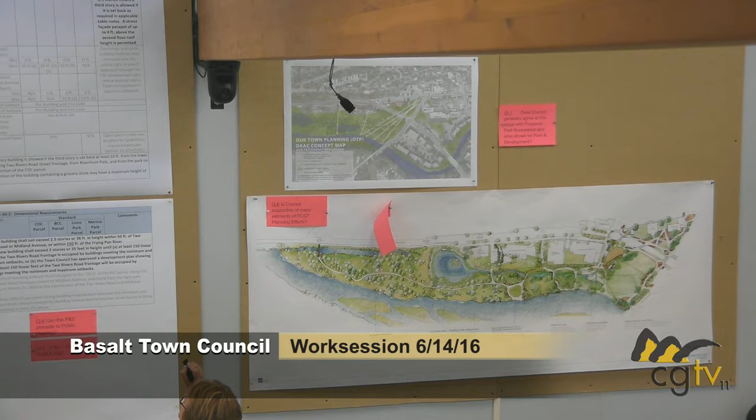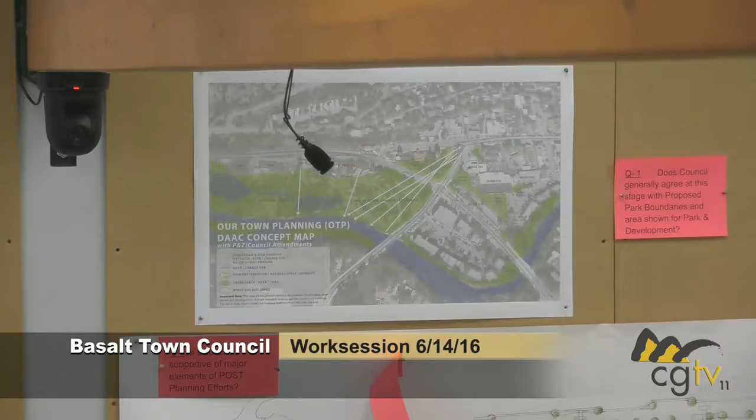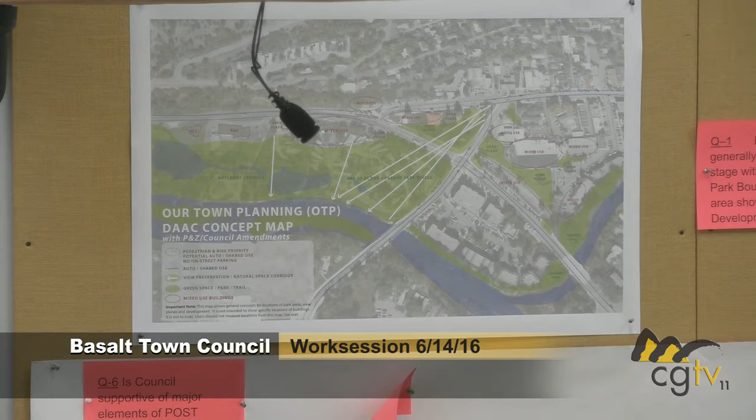Our second question is, does the council agree at this stage with the number of stories and the height for our town planning parcels? Question 3 is, does the council agree with the uses that are being recommended for the 4 parcels? 4, can the P&Z proceed with their process for adopting the CSC zone district regulations? And 5, if the answer is no, then what kind of direction does the council want to give the P&Z? Then 6 are the items that concern the Parks Open Space and Trails Committee.

One is if the council is supportive of the major ideas, the major elements of the POST planning efforts, and if the answer is yes, is it still appropriate that we're working towards this July 12th deadline that we'll be talking about a little bit later. So with that, I'm going to turn it over to Laura for her history.

Hi, Laura. Hi, Jackie. How you doing? Good. I'm Laura Kirk. I'm with DHM Design, and Jackie called me a couple of weeks ago and asked if I could do a 10-minute history of the planning on the Pan and Fork property. And I'm telling you, that is a pretty tall order. So we'll see how I do.

So really what I'm going to do is focus on milestones in the planning process, and I'm going to go pretty quickly. I just want to make sure we don't forget the level of passion and commitment and engagement and participation there has been on the part of this community throughout that planning process. So as I whiz through that, I just want everybody to remember that, because sometimes it will seem as though perhaps we're not giving that its full due.

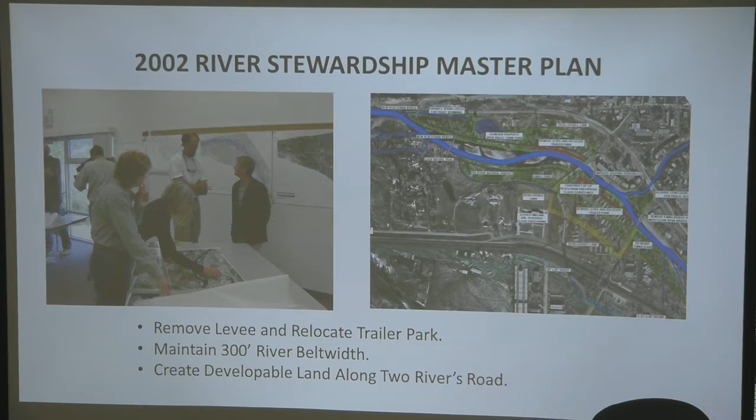Those principles were incorporated in the 2007 Basalt Master Plan, reinforcing the work that had been done earlier in 2002.

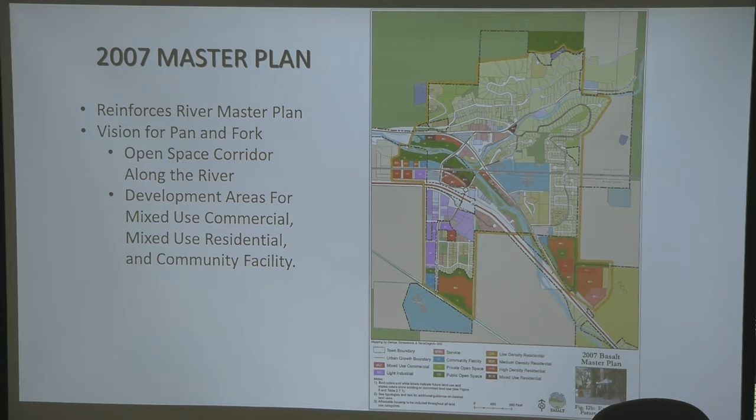In 2011, there was a major movement regarding the Pan and Fork property. The Roaring Fork Community Development Corporation and the town of Basalt bought that 5-acre parcel. With that purchase, planning and design moved forward on both the CDC parcel and the town park parcel, incorporating the primary concepts from the 2002 River Stewardship Master Plan.

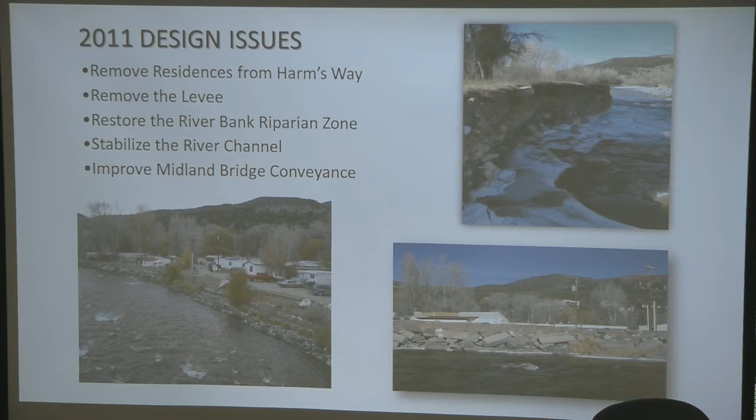Between 2011 and 2012, there were a wide variety of public meetings on both the park parcel and the CDC parcel in all kinds of venues, and there were presentations to P&Z and the council.

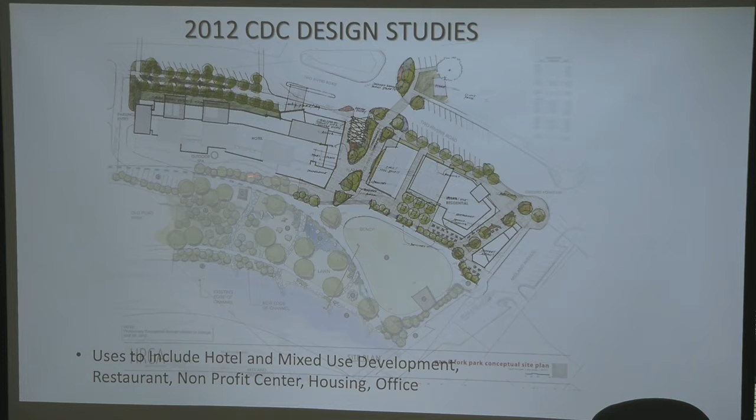One concept presented in the fall of 2012 was when the CDC was working with a hotel developer. They had a concept for a hotel on the west end of the property. The RMI side is on this end. In this area, this is Midland Spur, there was a proposal for a CMC or a nonprofit center. On the corner closer to Two Rivers Road and Midland Avenue was a proposal for mixed use, including some residential. And on the lower half of the property, the park planning effort was moving forward.

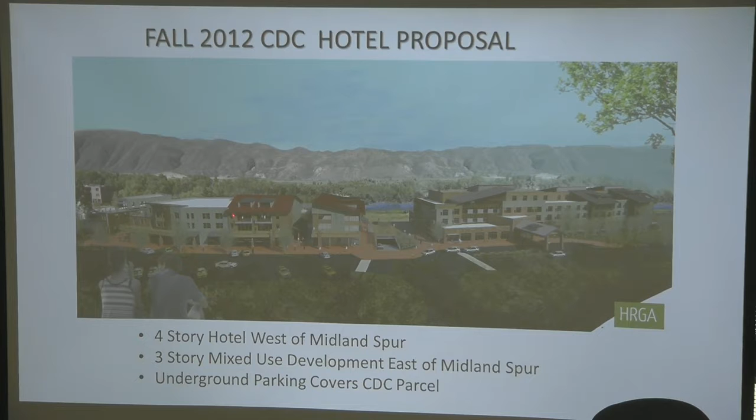The park planning effort was moving forward with constant check-ins with POST, the public, council, and P&Z. Many of the program items envisioned in 2012 are still carried forward in the park planning effort today, including an event lawn, a band shell, a children's play area, and some extension of passive recreational and wetland areas.

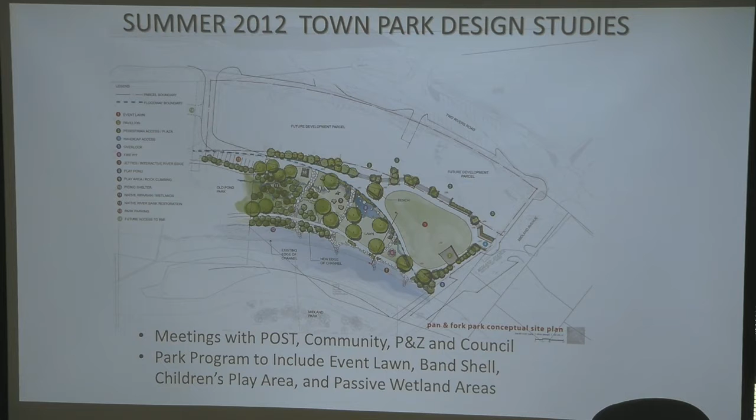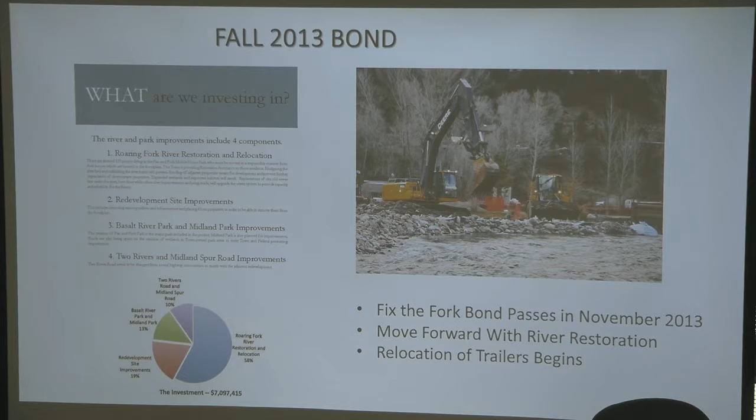The next major milestone happened in the fall of 2013 when the Fix the Fork bond was approved by the community. That approval allowed river restoration work to proceed on the river corridor itself, and that's when work began in the river corridor, which also triggered moving forward with the relocation of the trailers.

At that time, the community also began a very engaged and intensive process, bringing forth their ideas for the vision of the Pan and Fork property. Those efforts proceeded in a number of ways, one being the Our Plan kickoff and the Our Town planning meetings. Those resulted in a whole series of plans generated by the community itself, ranging from plans with very intense development to some plans that saw only park.

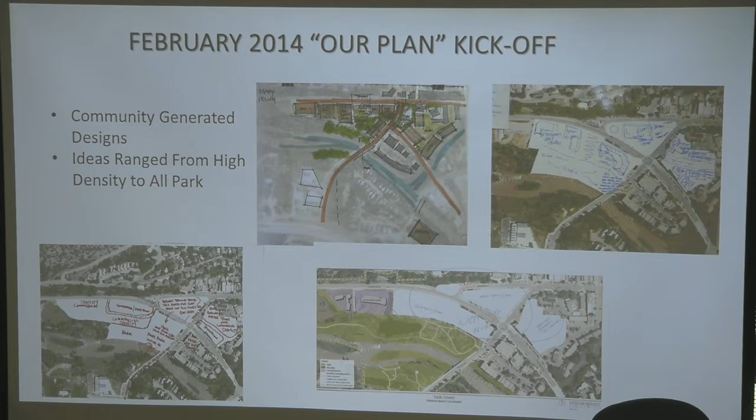The next phase of the community planning effort moved forward with 3 site plan options presented in June of 2014. The 3 options were voted on by the community in a web-based, unscientific survey, and looked at different arrangements of development on both the CDC parcel, park open space along the river corridor, development in Lions Park, and development in the Clark's Market area.

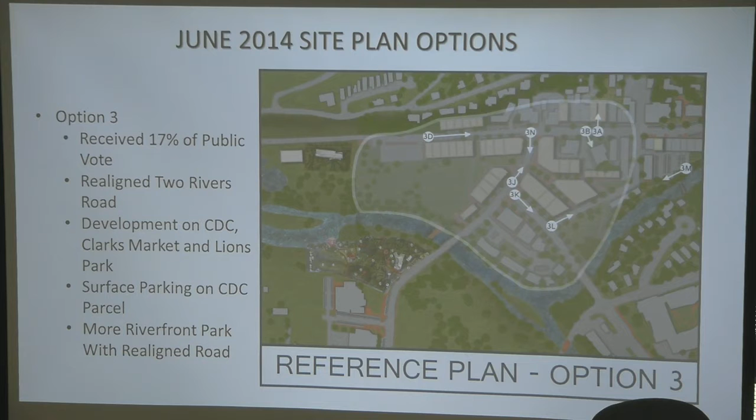The third proposal was different from the other two in that it removed Two Rivers Road here, relocating the streets and having intense development along Midland and the realigned Midland Spur, as well as in the Clark's Market area.

Want to interrupt just one second? Yep. I know we talked about this, but I can't remember if there's any way that we would have known what these different options' square footage was or anything.

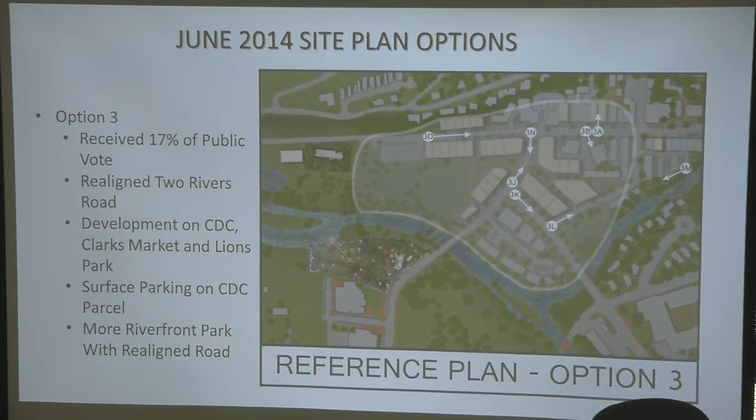There were, with each of these site plans, a whole series of drawings that went with them. In terms of square footage of development, I don't think those were there. Visually, you get an idea, a little bit of one.

At this time, there were still trailers in the park, and they were just going through the relocation process. The river restoration construction was underway, so the view we have now from Two Rivers Road and Midland wasn't available yet to the community. I think once the trailers moved and the restoration project moved further along into the fall of 2014, that's when the nature of that property really changed in terms of people's ability to envision how it might be.

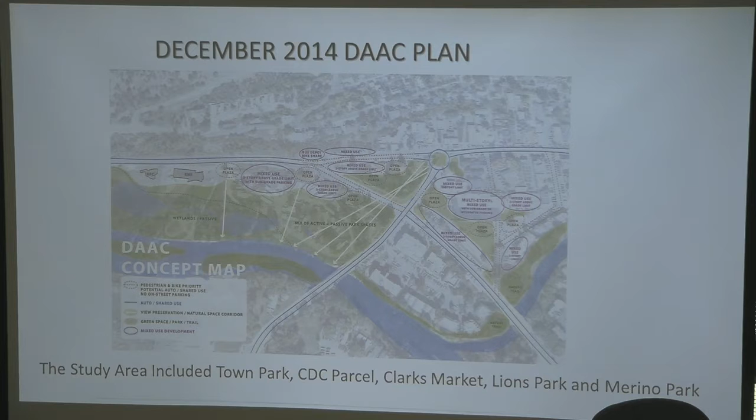Moving along at the same time, Lowe's Development was working with the CDC and had reached a development agreement with the CDC, moving some development proposals forward. The Lowe's Development Group had incorporated the Big V into their proposal.

This was one of their proposals that included a hotel and a series of mixed-use development. They envisioned development in what they called the wedding cake, a mixture of 3, 3.5, and 4-story buildings. This is an illustration of that development from the south side of the river.

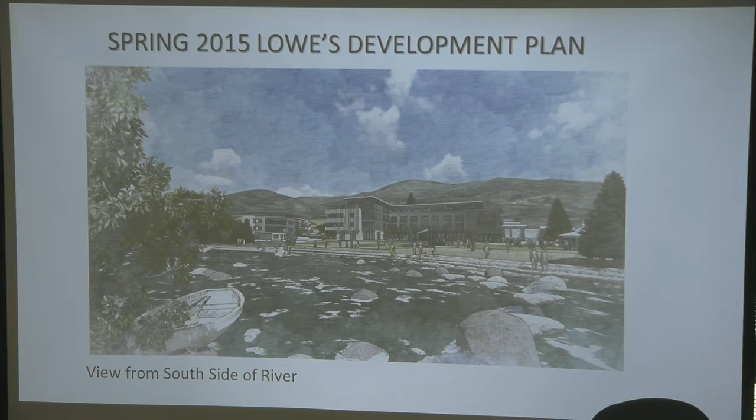The square footage on the first proposal from Lowe's was 155,000 square feet.

In April of 2015, Council was having one of its regularly scheduled quarterly meetings, and they took up the discussion of what was starting to feel appropriate in terms of development for that parcel, based on the proposals from Lowe's and community input derived from a variety of public meetings, both with P&Z and Council.

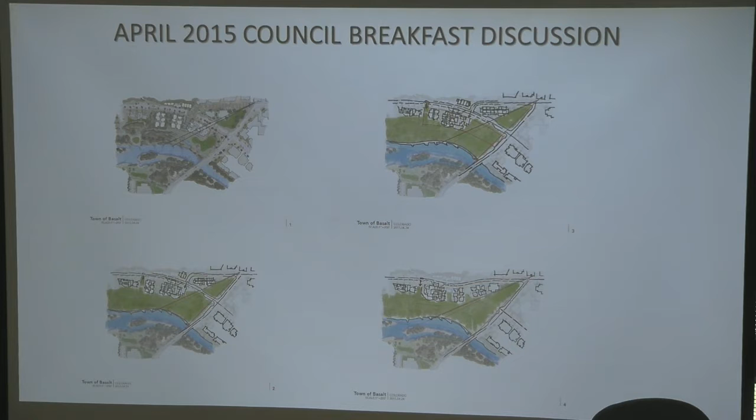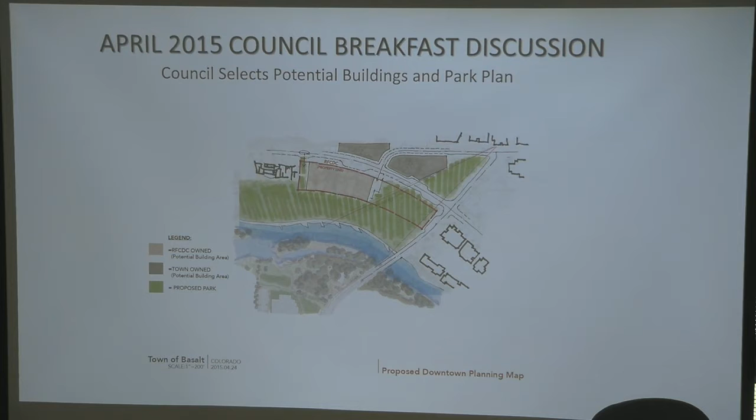That resulted in a new diagram. You can see here that now the private development is looked at as occurring from the Midland Spur west, and that everything east of the Midland Spur would be what has now become called the Polygon, as well as the park and open space maintaining the Big V.

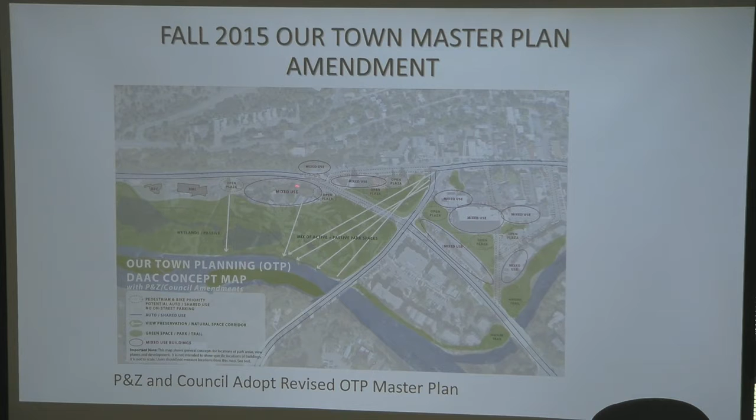That drawing and concept was further refined through a process with the P&Z and the council to develop this amendment, including this new map to go into the previously approved DAAC master plan. This revised map again includes the Big V, and again shows development west of the Midland Spur.

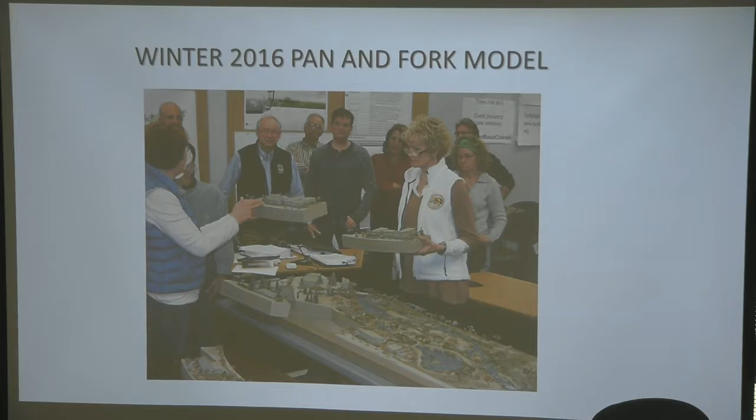To help the community understand what all this means—because you look at all these maps and it's really hard to envision what it looks like—the model behind you was commissioned to help put that into 3D perspective. There are a number of parts of that model that can pop in and out so that different development proposals can be looked at and evaluated.

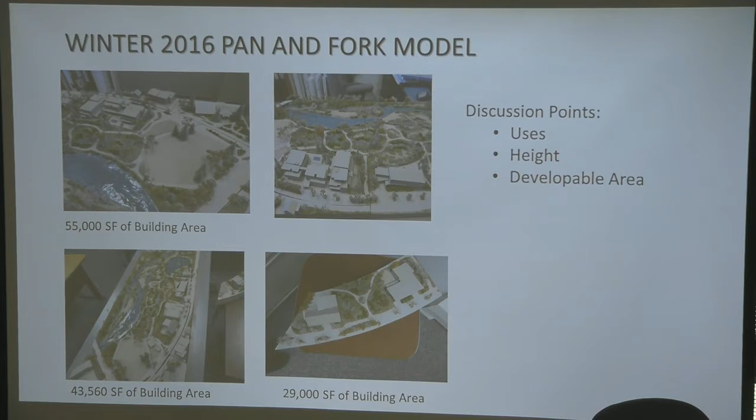One of the proposals included a new development plan from the Lowe's Development Group, looking at 55,000 square feet of development. There was also a proposal from the Citizens Petition Group that looked at a slightly smaller amount of square footage, configured in a different massing with lower view planes.

While the discussion about development on the CDC parcel has continued to move forward, so too have the design efforts for the park planning effort. All through 2015, we had a variety of meetings with Post, the community, and others, and here's a drawing by one of the Post members helping us look at development of the park design.

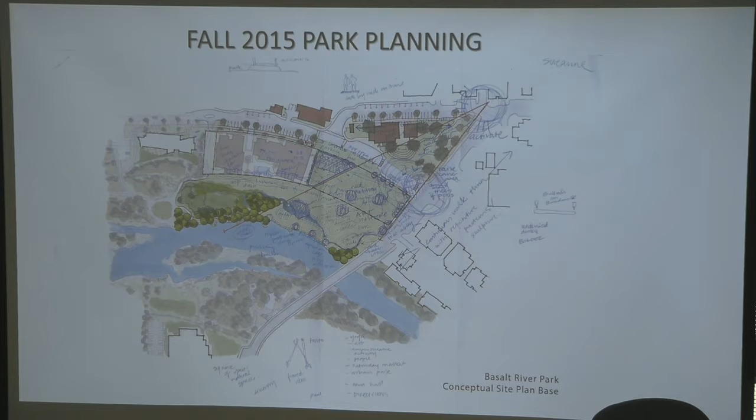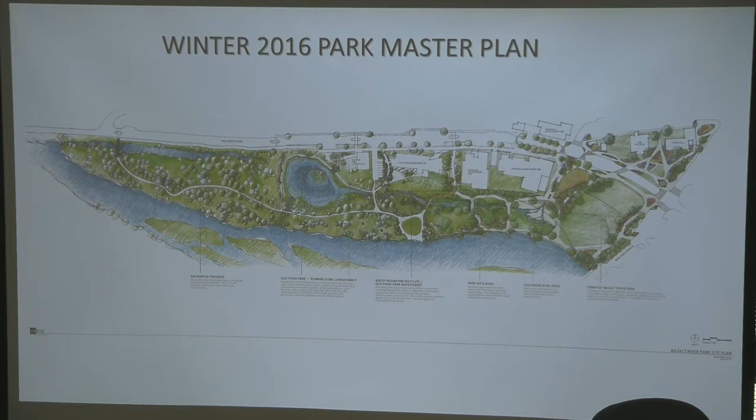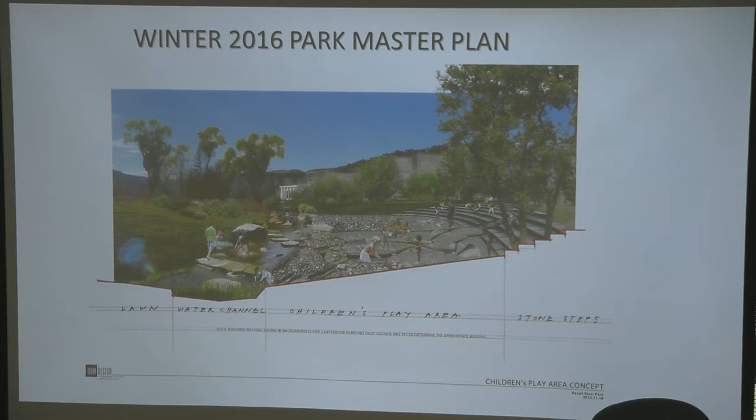This is the Polygon area where we've been looking at a restaurant and some uses like that, the children's play area, and then continuation down to the passive park. Associated with that have been drawings of different elements, including the children's play area. So that is the 10-minute history overview.

I think then Dylan and others will talk, as Susan said, about where the P&Z is, and Julie can give more information about where we are in the park design and how we've arrived at the drawings as they are. Laura's staying here, so if later you have questions when we're in the Q&A, we can get to additional questions then. Okay, thank you.

So your packet information also continuing in that vein of history included what are some of the major decisions or direction that the council gave, and where did those decisions happen? What date were they approved? We followed up with a list of all the resolutions that I referred to in this decision piece, and other important resolutions.

But before Dylan starts, I just wanted to leave us with this: we did emphasize that we amended the 2007 master plan to include our town planning master plan amendment. So the future land use map for these 4 parcels that we're talking about is now this.

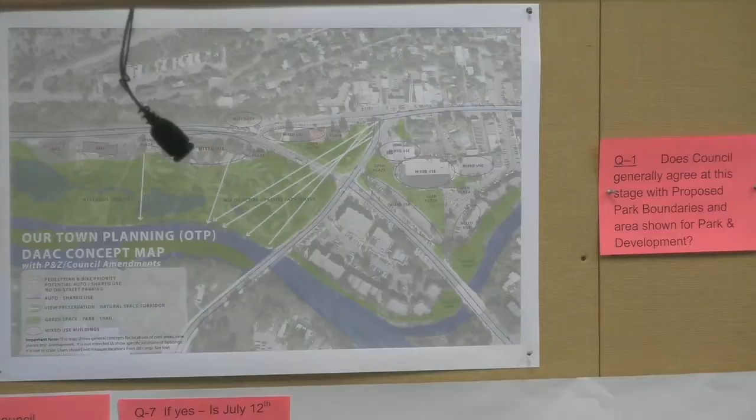But the changes that the P&Z made are really highlighted on page 3 of your packet. One of the main things was to revise the district so that it would apply to all 4 of the Our Town parcels. So we have the CDC property, the BCC property, which is kind of an expanded area of the Aspinalt, the Prinster Cabins, the Restore Store.

It actually includes a little bit of the Alpine Bank building and the gas station. It includes Lions Park and then Merino Park. So one of the main things that the district did was develop regulations that applied to all 4 parcels.

One of the first discussions that the P&Z had was, what is community serving? Because it was a community serving commercial zone district. The original concept was that you had to be a nonprofit campus, but the discussion with the P&Z was that community serving meant that it had to have an anchor use.

They related the anchor use to uses that the town council or the town had mentioned, uses that the town really wanted to see in these 4 parcels, and it was supportive of the vitality ideas that were coming from the DAAC report. So those uses were a wide variety: a grocery store, hotel, a brew pub, distillery, and it also included this idea of a community center.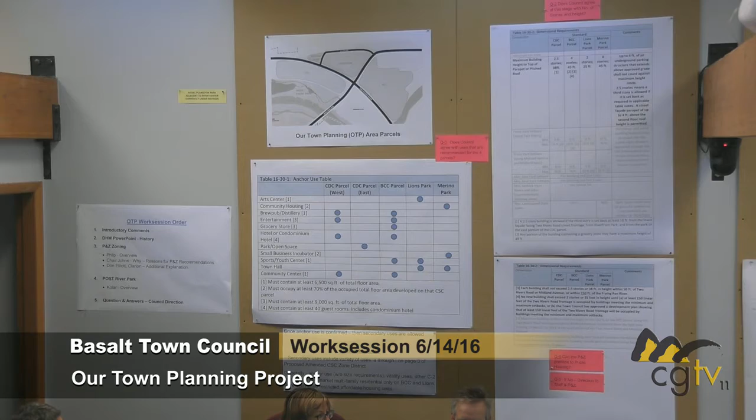So how this chart works is that you have to have one anchor use on each one of the parcels. Here's our list of options of our anchor use. So you have a choice of which anchor use that you can have.

Once there's an anchor use that's committed, then you can have a secondary use. I think that's a concept that some people have a harder time grasping, that there's a whole list of secondary uses that could be permitted on the property. They include the anchor use without these square footage or size limitations.

It includes vitality uses, C2 uses. It allows fully deed restricted affordable housing units. One thing to point out is that free market residential units are only permitted under the current draft in the BCC property and in Lions Park, and that they're small units, limited to 1,400 square feet.

So that's how the uses work. In terms of the dimensional requirements...

The model really helped the P&Z get a grasp of how many stories would be permitted on the property. Generally, everything on Two Rivers Road is 2.5 stories, meaning you could allow a third story, but it had to be pulled back 10 feet from the road. That 2.5 stories also carries on the CDC property, where the third story has to be pulled back from the sides adjacent to the river, with some exceptions the town council can consider. The place where 4 stories is permitted is on the BCC property, but only in the interior. If you had a grocery store, the height was allowed to be slightly higher than that.

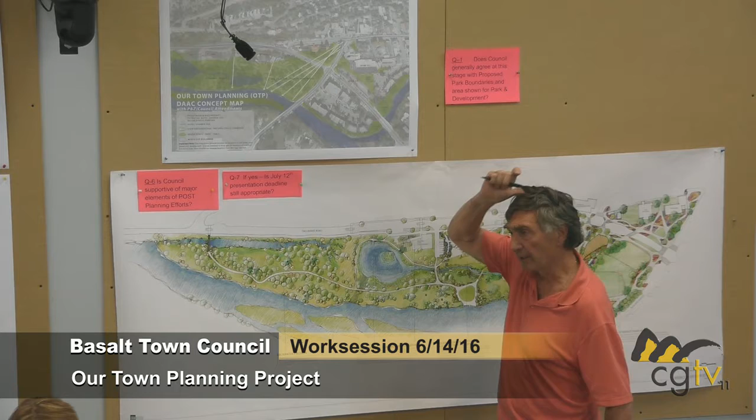Along with that, there's a sizable amount of land ideal for underground parking with a building on top. The usage for that would be perhaps for larger buildings. Whether another hotel could be sustained there is another factor, but there are other activities that could be there, used both by the people and by the buildings.

This is also a beautiful park down by the Frying Pan River, which you don't want to take second cousin to the Roaring Fork, and it makes it natural to tie back to the park. We thought this would be a great way for the linear, or curvilinear, quality to it to really be all pedestrian.

And on that pedestrian area could be temporary kiosks, or different kinds of merchants, so that this is a very active and viable kind of retail that brings vitality both to the existing building and to the new.

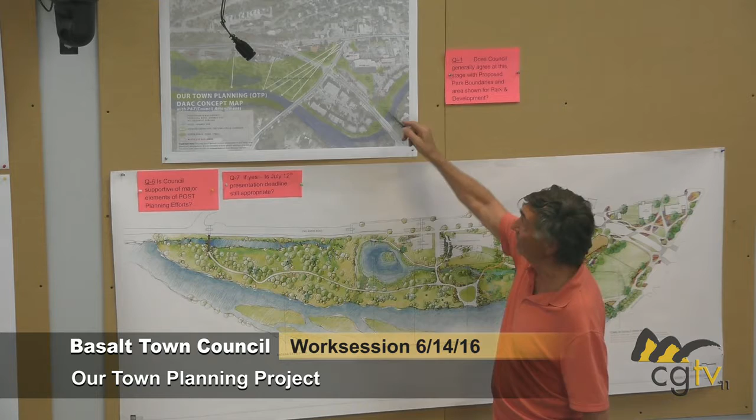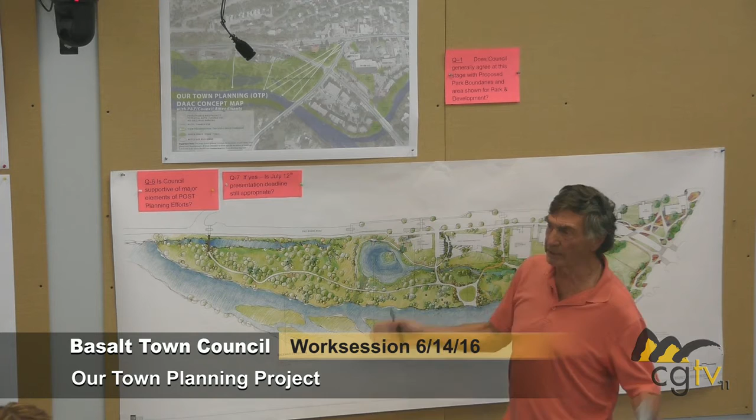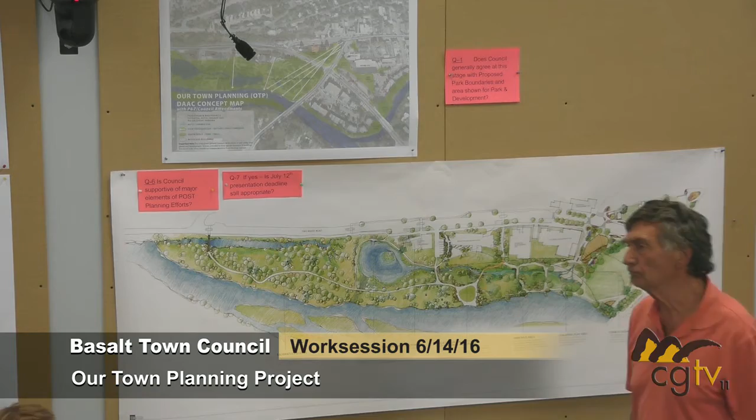And so, Eric, did you want to? I got nothing right now. So I think now we're ready for Julie to come up and talk. I'm trying to decide if I want to stand by the map or sit here. I guess I can do both, yeah.

Hi, I'm Julie. Thanks for coming, Julie. Some of you have heard me before.

I think we have the unique opportunity and challenge to design a park around development that we don't know what it's gonna be. So it's kind of interesting.

Really, the genesis of where we came from was taking a look at the uniqueness of the parcel itself, all the things that may be appropriate for it, maybe desired by it, enjoyed there. Also taking a look at our entire inventory as a town. We've got a lot of amazing parks, open space and trails, so kind of weighing that in the balance. And then, of course, taking a look at the big picture that planning and zoning so eloquently stated of all the different possibilities and things happening around it. So this really sits at the center of quite a bit.

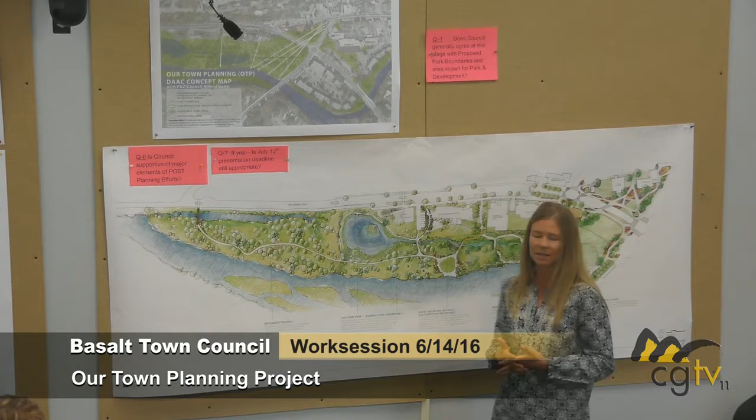To date, and Laura can speak to this much better, the restoration of the landscape itself has been brought to a sustainable place. Some of the trails, and a lot of the wetlands trails and this work has actually been done. I don't know if you've been down in there. I walk there every evening. Yeah, it's really amazing. So there's a lot of work that's been done that's going to fill in over time with the natural vegetation and whatnot.

And the rest of it is really going to be, the phasing that you talk about is probably going to be as price dependent as it is relative to the development that goes on. So I don't know if there's any specific plans to get a phasing approach, but the two kind of go together with the costing estimate.

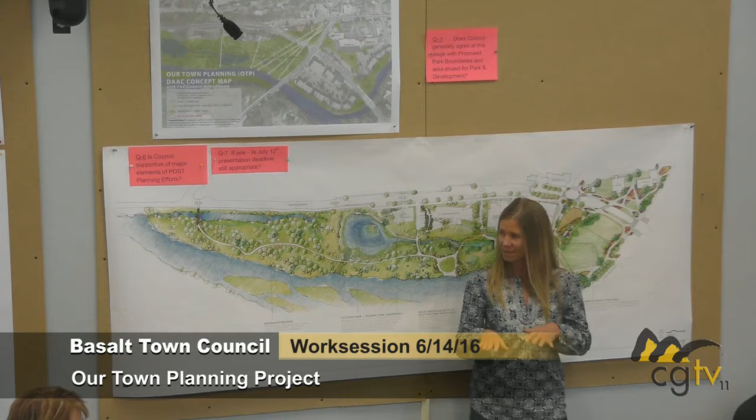Yeah, I think, depending on how you answer some of these questions tonight, we're going to continue moving forward to come up with baseline construction costs, and that will help start to define phasing implementation.

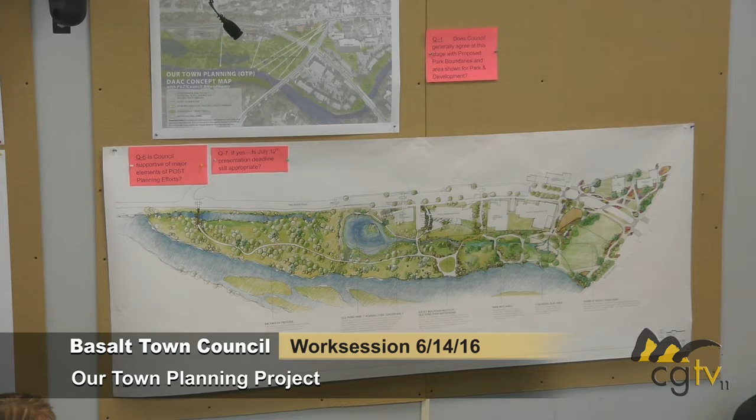I mean, we initially were kind of hoping that we could finish a lot of the work that was around Old Pond so that we could get the handicap access and the use of the pond. And we were kind of hoping optimistically that we might be able to do that this year, but...

We are speaking with architects, lighting designers. Obviously, we have a hugely talented landscape architect on board. So that is kind of the costing and phasing homework we're doing at this time, to try to understand as best we can what sort of cost ratios we're in.

I think that sort of roundaboutly answers your question. A lot of the design does reflect, at least to the best of our ability, some sort of sustainable design or building approach, such as mobilizing utilities in concentrated locations. So we're not stringing buildings on opposite ends of the park. We're trying to keep things together so that we can piggyback on other utility work that's being done. So there are certain, I guess, not formal phasing ideas that have happened, but in the design process, those are considerations we use while locating things and making considerations for certain amenities.

I didn't know if Paul and Cindy, you guys wanted to add anything else? Paul? No, I think Cindy? Julie.

Can I ask Susan about the mention of the Old Pond Park? And what is the phasing on that, and is there funding for that?

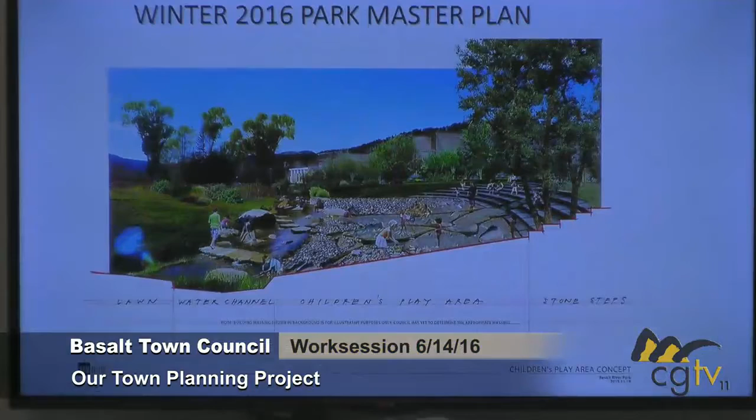So when you're talking about the east portion being the park, that's this portion, and the west portion being the development portion, you're kind of looking at the map. In the zoning district map, there's actually a little map in your zone district, and we'll clean that up a little bit and make it nicer. Do you have a thought, Dylan?

Yeah, so this question gets to what I was trying to describe in some way with this whole, we're not exactly sure how big the parcel is, we're not exactly sure how tall it might be depending on when you measure it. Our focus was really not to get into the physical constraints of any of these sites. It was simply to try to develop a working program for an alternative zoning which would hopefully incentivize and follow through with the goals outlined in the DAAC report and all the other community feedback received. So where that line was drawn in a diagram, that's as much definition as there is.

I would add one thing, that we talked about this idea of the polygon, and if someone wanted to come in with a brewery, as an example—not saying someone's proposed that—and they wanted to have a beer garden that overflows into that polygon, that's kind of a cool use that we don't want to limit them from proposing by saying the line is here. Right, excellent.

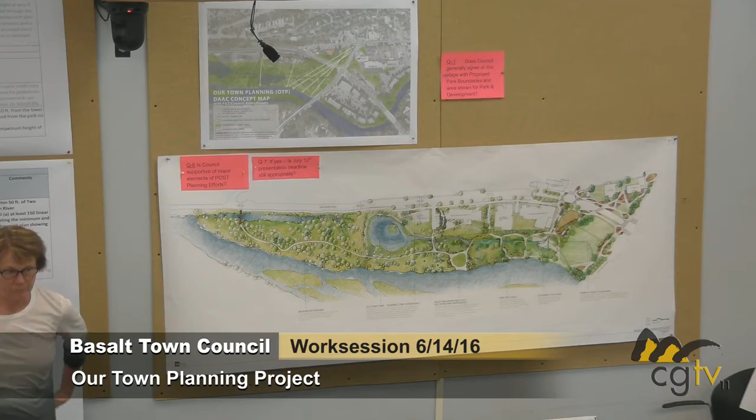Yep, so that is the town of Basalt's master plan to be used and considered, but it is not totally prescriptive.

Could somebody come in with a PUD and choose to do something quite different, or does the protection come not at the master plan level, but at some lower level? You said it's not necessarily at the most granular level.

Notice that Mike's leaning away from me.

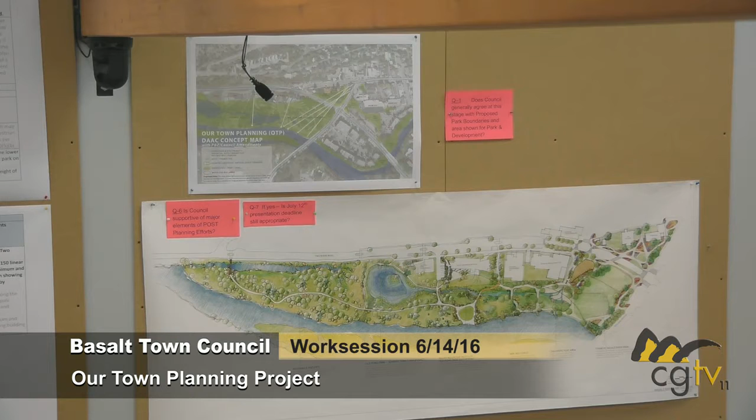Since I was the one that formulated this question, I said a question we're going to have to go back and address is the park boundaries. It's been said, it's been prescribed, but it hasn't been decided. You have to come to a point where you say this is the edge of the park. Does this picture present what you believe is the western edge of that park as viewed from the Big V? Is that it?

One more question. I think I heard this evening that the park includes the polygon. Yes, and then you also heard that a development, if it had a use that's been described as public, a restaurant, a beer garden, would that be considered a use for the polygon?

Jen, did you have something else? Oh, I'm playing with my pen, excuse me. Yes, I'm thinking.

I don't think we want to go down too far into detail, but the plans we're working on with POST are showing some pretty cool plans for the polygon. The idea is to include very small restaurants and an event center, getting at these ideas that DAAC is promoting.

So the master plan had some flexibility language, but the general principles of the master plan are obviously to be adhered with.

What would be nice to do is to actually place pins and draw that western edge and the polygon so that people know where it is, and when we talk about it, that's what we're talking about. It's not amorphous, it could be 10 feet this way or 25 feet that way. This is where the boundary is.